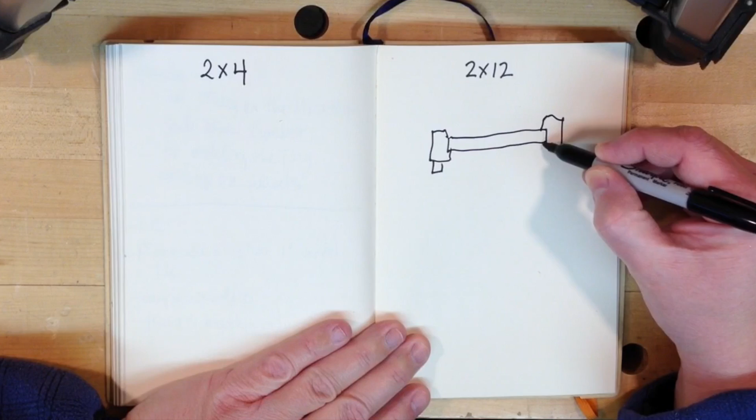Now that might seem like a little bit overkill, but if you take a look at the way I'm going to do the trailer, the deck sits like this, the wheel wells sit like this, there's my tires.

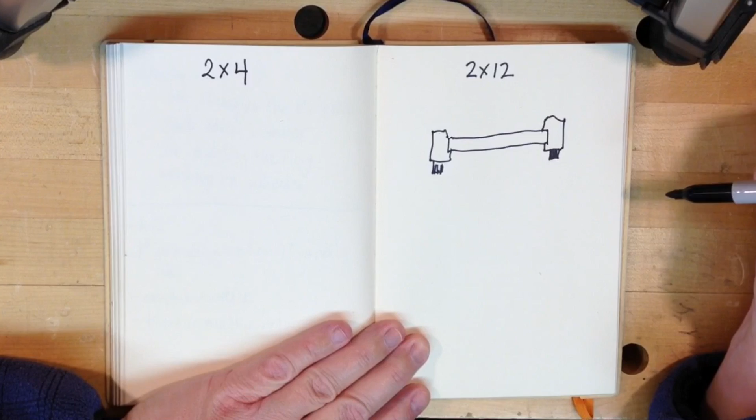On most of these tiny houses, they're built short, but they're also built narrow because they're worried about road restrictions. I don't think I'm taking mine on the highway, but it would be nice really to be able to move it around, which is why I want it on wheels, because the spot that I'd like it to end up has a building that needs to be torn down before it can end up on that spot. So I'd like to build it before I end up tearing that building down.

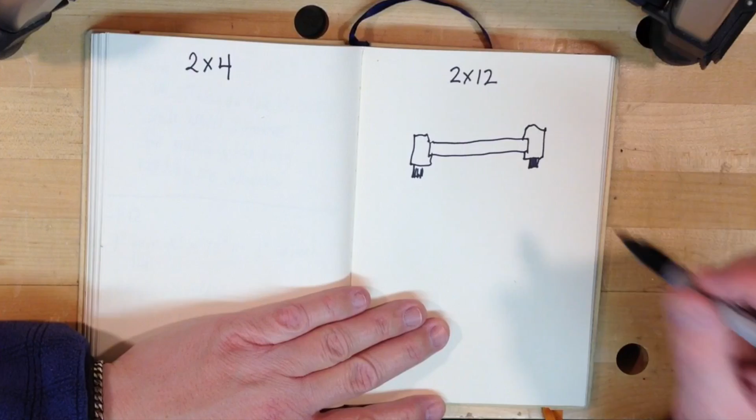Now the problem is that when I put a floor in here, the last thing I want to do is put a floor in and have a bunch of boxes that I have to trip over or figure out how my machinery is going to go around.

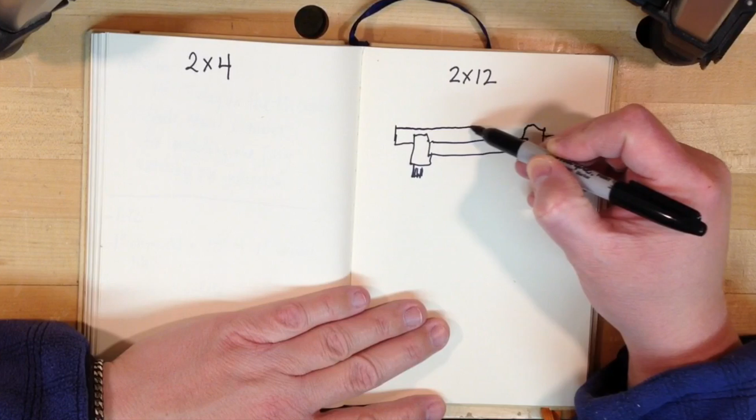So if I use 2x12s, they're just high enough that it'll get me over top of the wheel wells, and I'm going to completely bury the wheel wells so that I won't have to worry about those boxes. Then I can have a 10-foot wide shop, which is exactly the same width as the one that I have, but it'll be 18 feet long instead of 10 feet long. And that's what I'm sort of shooting for.

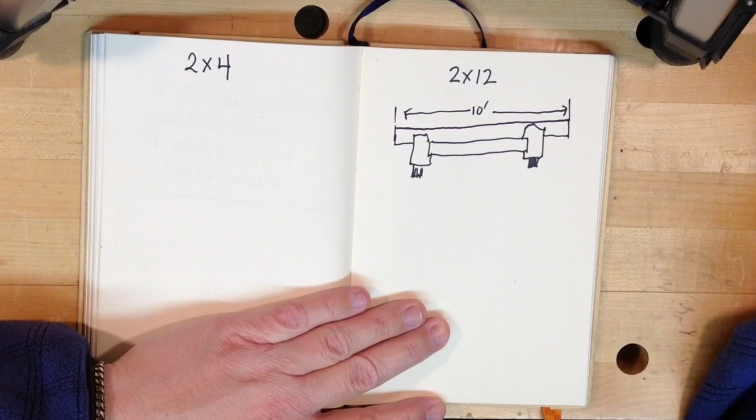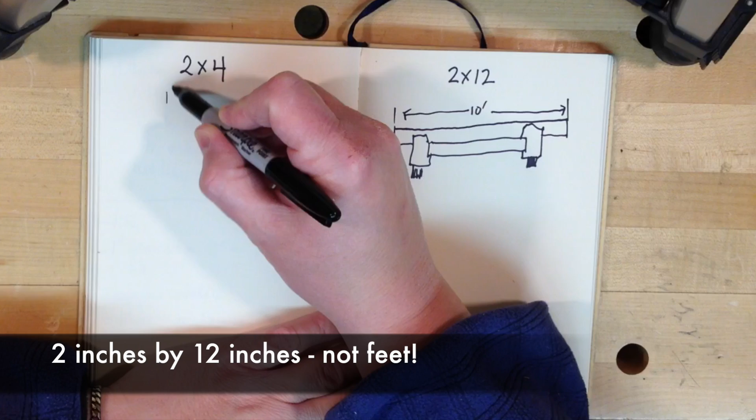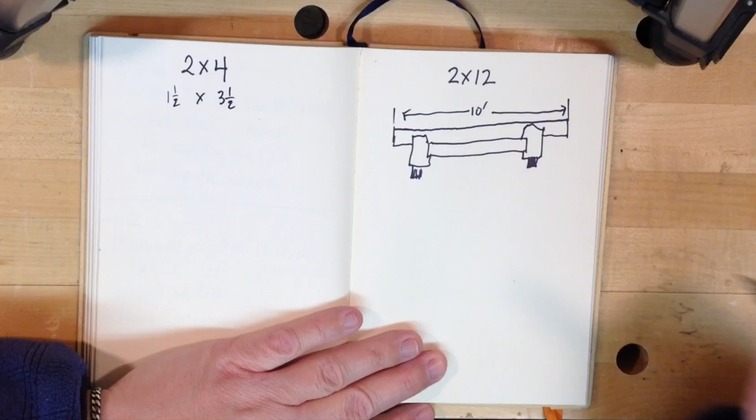Now, the problem with this is when you're making these, the nominal lumber size is not 2 inch by 12 inch. For a 2x4, it's actually 1.5 by 3.5. So I can't use 2x4 as my measurements when I'm trying to figure out the mini lumber. A 2x12 is actually also 1.5 by 11.25 - I keep thinking 10.25, but it's not, it's 11.25.

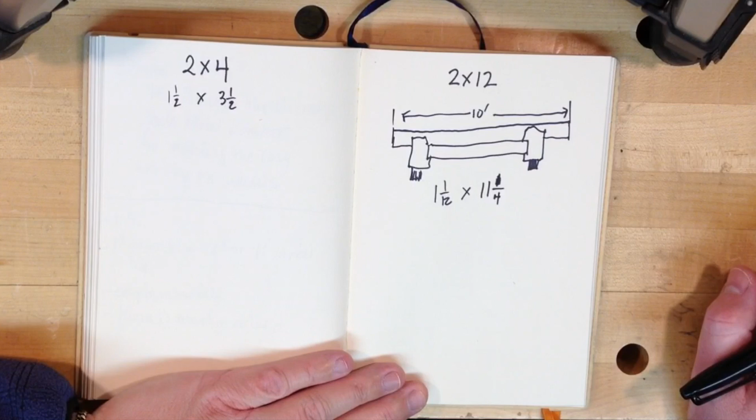Okay, now because my scale is 1 to 12, I just have to divide all these things by 12 in order to figure out how big to set my calipers when I'm actually milling this stuff on the bandsaw.

Now the problem is that when it's in fraction form, it doesn't work so hot. So I'm going to call this 1.5 inches by 3.5 inches - and this should be half, not 1/12, I have 1/12 on the brain. This is also 1.5, so I can use the same calculation instead of doing it twice, by 11.25. So there's basically only 3 measurements that I have to calculate.

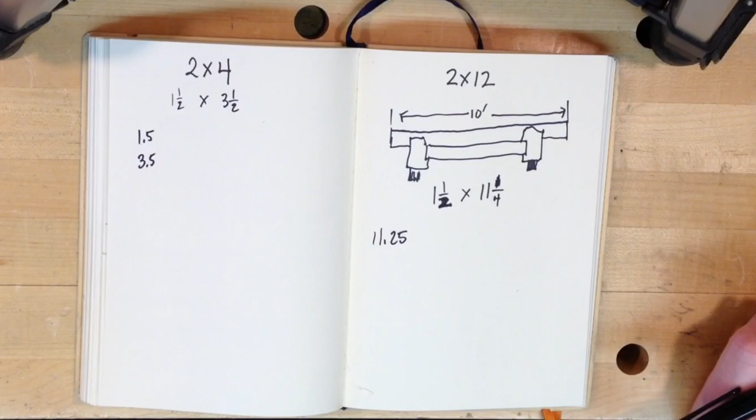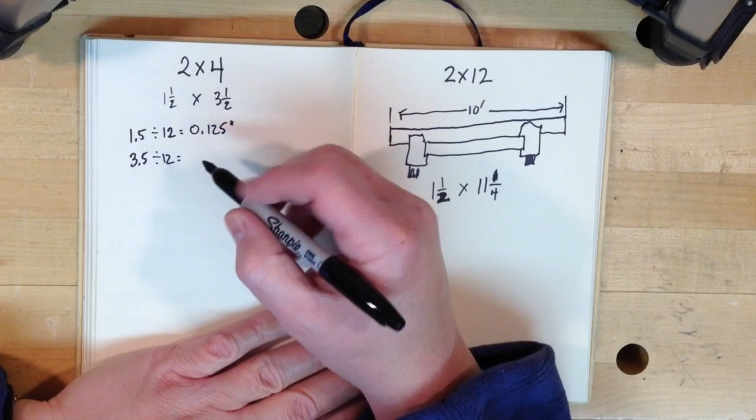What I have to do in order to do this is divide each of these by 12, because I want to find out what it is in 1/12 scale. After punching it out on the calculator, 1.5 inches is 0.125 inches. So 1.5 inches in real life is 0.125 inches on the model. 3.5 divided by 12 gives me 0.2917 inches on the model. And 11 1/4 gives me 0.9375 inches on the model.

Now, what the hell do you do with this? Well, it's actually fairly simple. You have to figure out how many 1/8 or 1/16 or whatever. So what I usually do is I multiply this by 8.

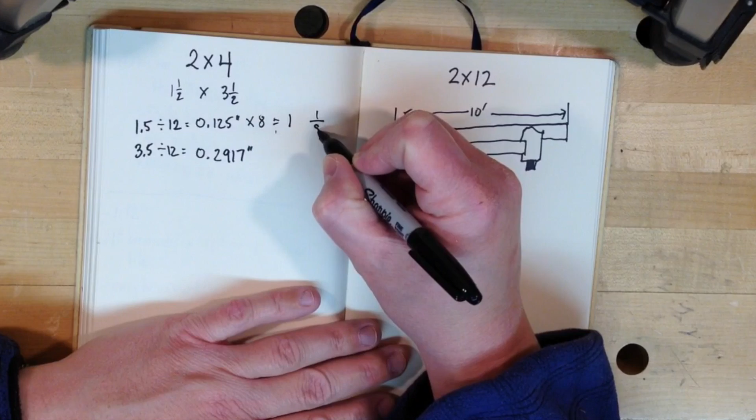In the case of the 1 1/2 inch, that's pretty easy because that times 8 is 1. That tells me I have to set my calipers to mill my miniature lumber to 1/8 of an inch to end up with 1 1/2, scaled down from real life.

With a number like this, if 8 doesn't work, in this case I found the number was hard to deal with. So if you multiply it by 8 and get a long decimal that isn't easy to round, you multiply it by 16, then try 32. In fact, I had to multiply that one by 32, and that gave me basically...

9/32. Whoops, why did I put 6 there? That gave me 9/32, but it was actually 9.18 something or other, I don't know, I'm just guessing at that.

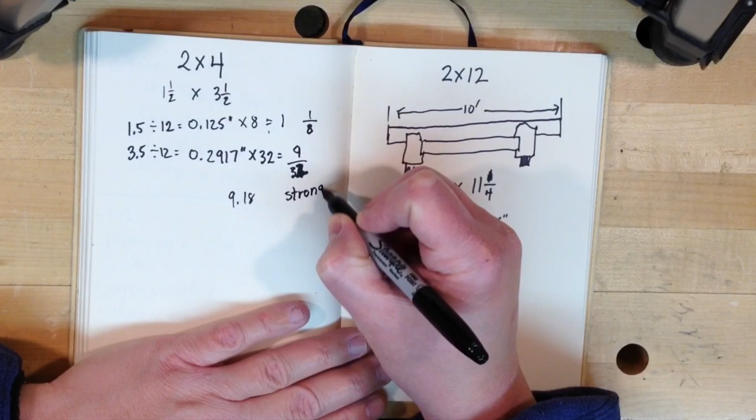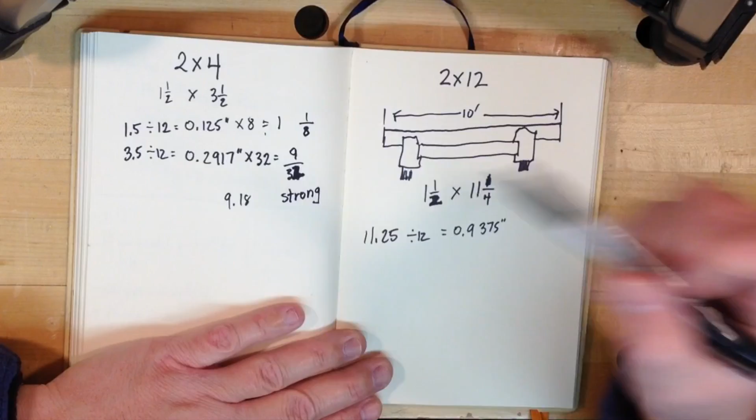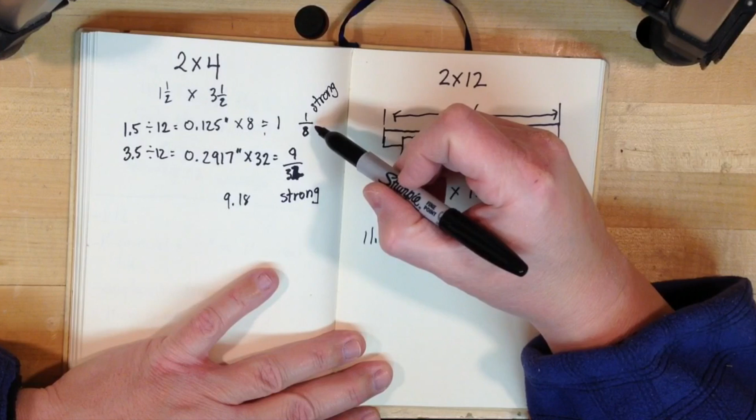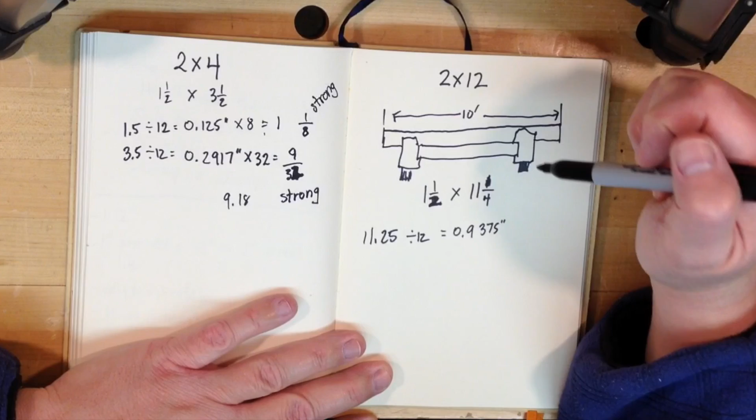So I'm going to set that at 9/32 strong, which just means I'll set my calipers at 9/32 and then bump them out a little bit bigger, not too much, just a little. I set this at strong too. I actually lied on my 1 1/2 inch dimension, or my 1/8 in the model version, because I thought 1/8 might be a little skinny when I started milling it. So all my 1 1/2 inch measurements, or 1/8 on the model, ended up a little bit larger.

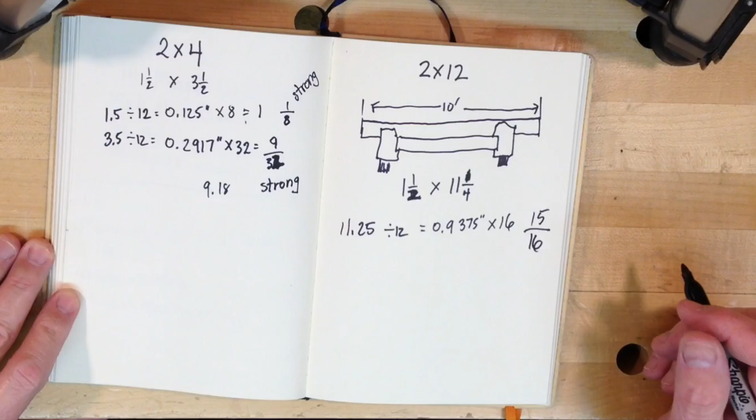When I come to this, I can multiply it by 16. So basically, if I multiply by 8, it gives me the answer in 8ths. If I multiply by 32, it gives my answer in 32nds. If I multiply by 16, it gives my answer in 16ths. So for a 2x4, I need to make a strip of lumber at least 8 inches long, because 1 inch in the model equals 1 foot in real life. An 8-inch stick equals an 8-foot stud in real life.

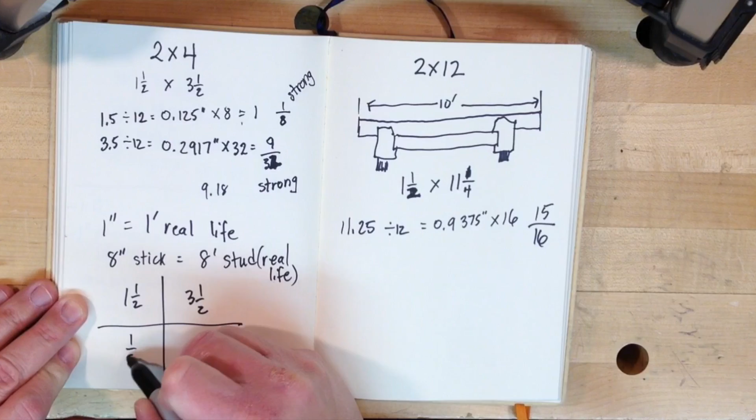So I'm going to mill my 2x4s longer than 8 inches, but the dimensions I need to set them to, instead of 1 1/2 by 3 1/2, on the model they'll be 1/8 by...

9/32. Why do I keep putting a 6 there? Why is that, Megan? I don't know. I don't know either, not enough coffee this morning.

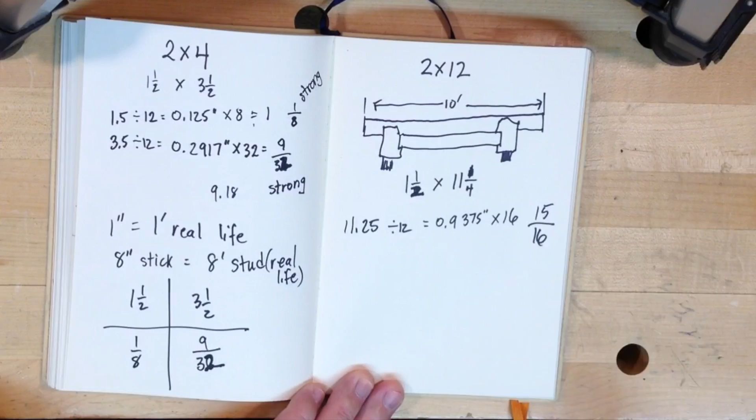Okay, and for my 2x12s, which are 1 1/2 by 11 1/4, my model version will be 1/8, I got that from here, by 15/16.

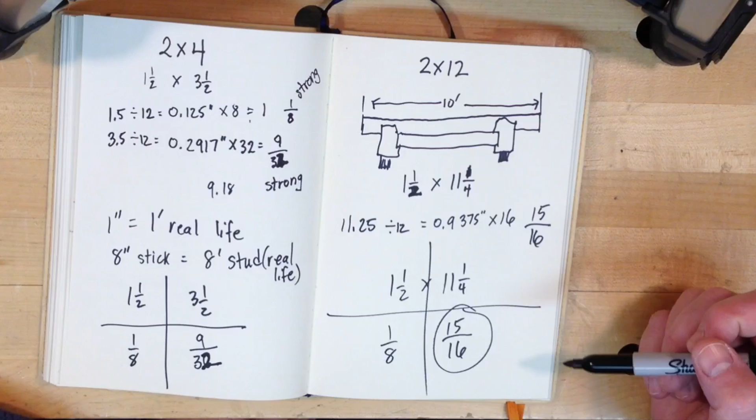Now when I cut this, I always cut the bigger dimension first. So I'll clean up the end on a regular piece of 2x4, then cut a strip that's 15/16 wide, then reset the bandsaw to 1/8 of an inch and strip it down into a little piece of lumber. It's actually pretty easy, it's the math part that's tricky — obviously I make mistakes all over the place today, and that's what you don't want to have happen.

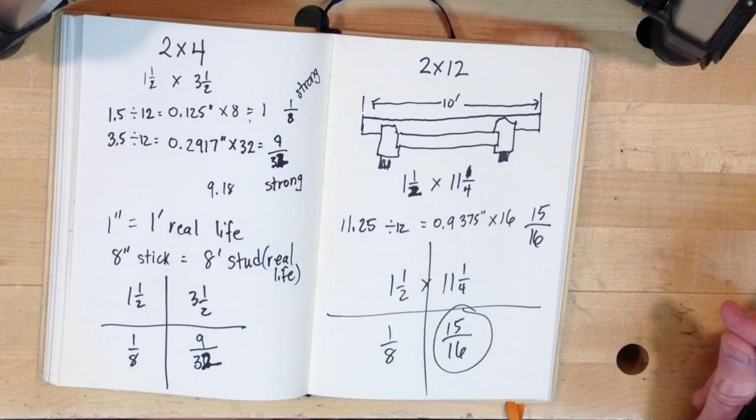Okay, here I've got a piece of 2x4, I just cleaned up the one edge. That's going to be the tops of my 2x12s. What I need to do is set my calipers at 15/16 of an inch, because that's what I calculated my scale height of my lumber to be. 15/16 of an inch. Now I need to set my fence on my bandsaw.

We'll cut the large dimension first. Too much sawdust, right, Megan?

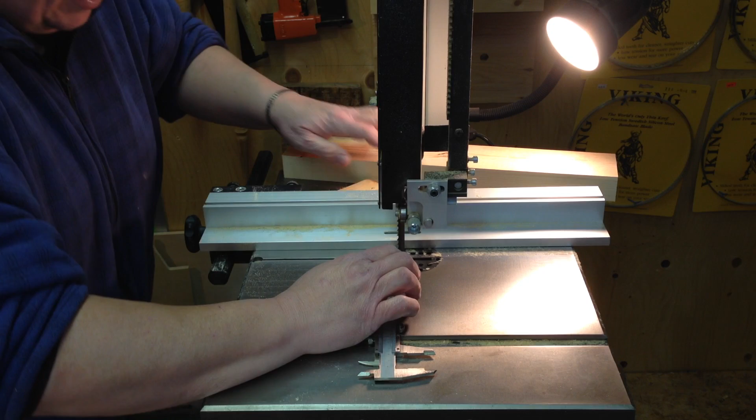Right. So, 15/16 of an inch from the inside of the fence to the near side tooth, and I'll probably rip off just a couple strips. I've cut this piece of wood, it's about 16 inches long, so that means in real life these will represent 16-foot 2x12s. I'm going to cut the 12-inch portion first, then flip the cutoff over, reset the fence to 1/8 of an inch, and rip out a whole bunch of little 2x12s. So here.

Okay, reset the caliper to 1/8 of an inch and just a hair more. That's 11 1/4 inches, or scaled down to 15/16. And when I rip these off, I'm going to have a whole bunch of little 2x12s.

I'm in the middle of making the little lumber, and this is why I'm looking at building a new shop. There's my bench, and there's some mahogany I've got waiting for my next project that I want to start today, but I've got nowhere else to put it. You can see I've got very little floor space. I've got the bandsaw out because I'm cutting the little lumber, and I don't have anywhere else to put this, and I keep running into it. It's falling over and hitting me in the ankles, and I think I've finally made my decision today that my shop's going to be 12 feet wide instead of 10. I figured 12 by 18, that ought to work.

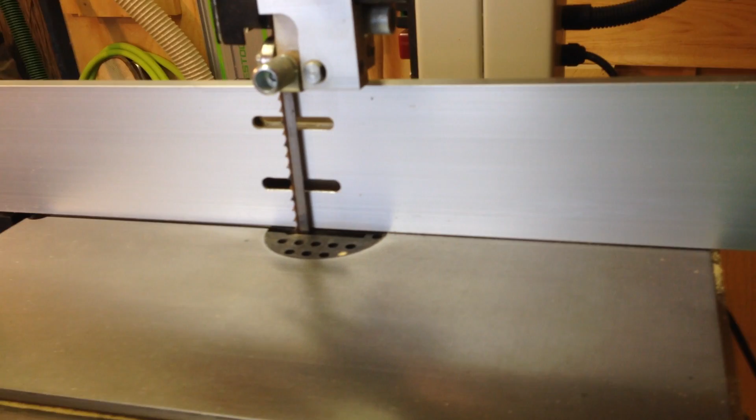So you probably saw at the beginning of the video, I was getting prepared to make the little lumber, and I had my bandsaw running. One of the problems, here, let me see if I can... that doesn't really help. One of the problems I had is that I ran a lot of this little lumber through and never worried about that little slot there, because none of the lumber got caught up in it. All of a sudden, every piece I cut off is getting caught in that stupid little slot. So I've come up with another way of doing this, which I think is a lot safer.

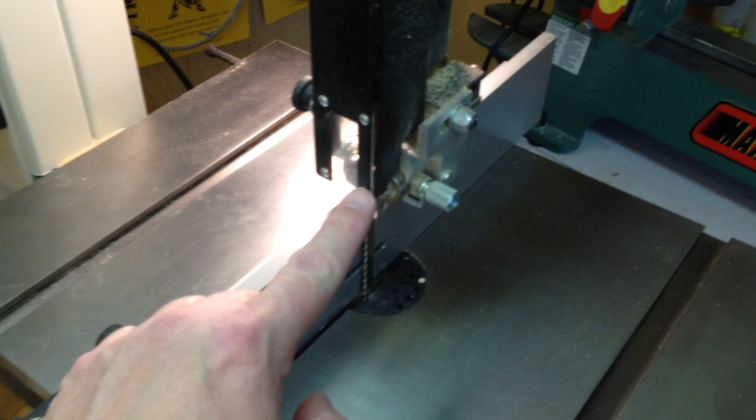You'll see that I can take my fence and flop it over, and I can either have a fence that tall or a fence this tall. I started out with this tall because then my blade guard didn't have to be this high off the top of the bandsaw. But you'll see in a second when I put the platform on there, the platform is thicker than this short fence, so I've had to use the tall fence, and because of that I've had to raise the blade guide up. So I have all this exposed blade, which doesn't make me very comfortable, but I'm going to be using a different push stick to push it through, and hopefully it all works out.

So give me a minute, I'll reset things and show you what the little platform looks like.